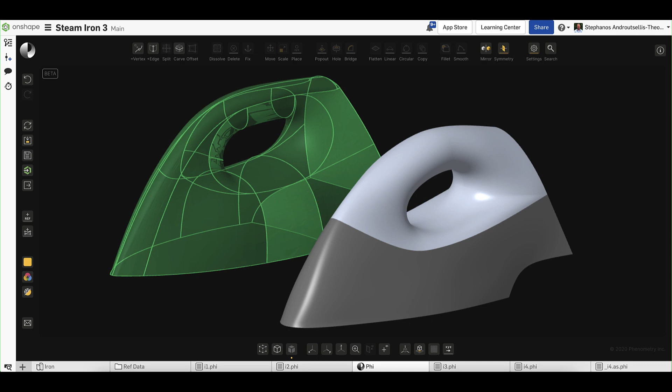We start by importing this Part Studio as a reference, that's why it comes green and transparent. We'll use the Convert tool to convert just two surfaces, the rear and the lower part of this steam iron.

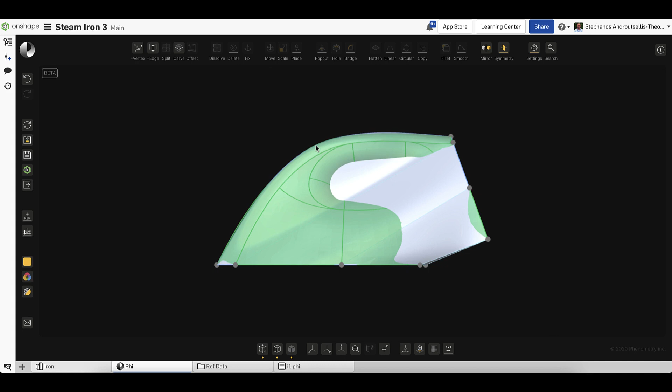As you saw, these are now two editable faces, and we do a bridge command between them to unite them. With this deformation, we immediately set the overall shape of our body. We add a vertex at a point we'll use later, and remove two edges added by the bridge command that we don't need.

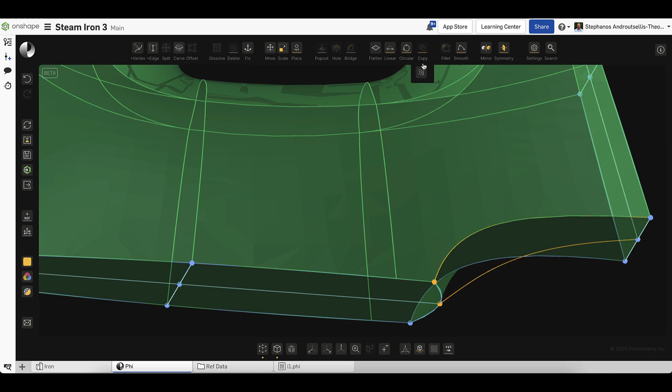Here we do a snap operation where we snap an edge onto a reference edge, and then a copy operation where we copy the shape of an edge onto another edge. So this is our starting overall shape.

We add an edge across this face, which is already there in the initial design. We're not snapping now because we don't want to exactly duplicate the design. We have some freedom in redesigning it our own way, and the same on the other side.

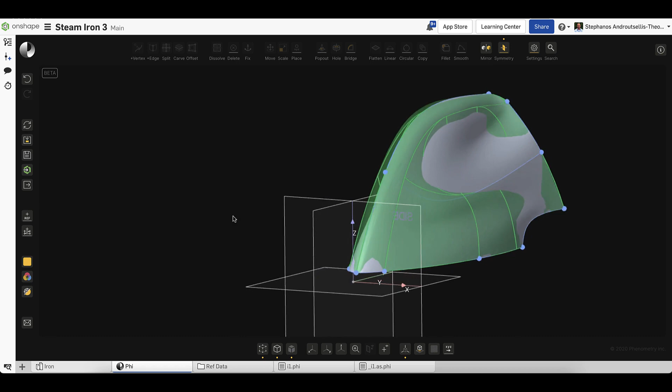We add a symmetry mate here in order to make the two edges perfectly symmetric with each other. As you see now, we deform the one and the other one is following - a little more symmetric deformation on both faces of this iron to make sure it's identical.

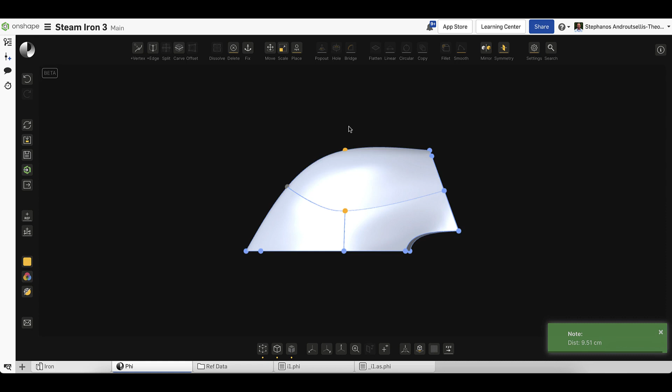Now we will add one more vertex at the location that corresponds to these two vertices on the faces, and we smoothen these new edges.

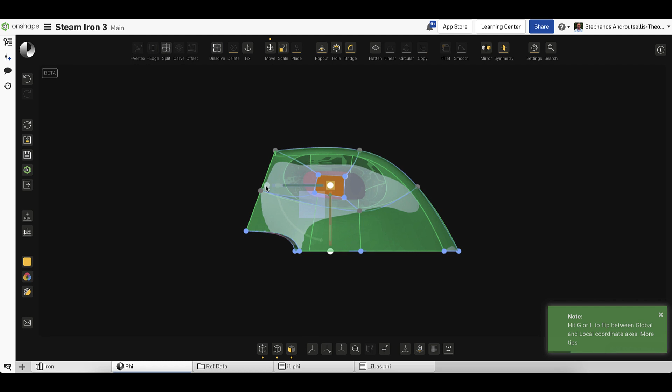Now we have to poke a hole through this face. The best way right now is by doing two offsets, which initially do not have the shape we're after. But as you see, we select them and move them roughly into place, giving them roughly the overall dimensions we're after.

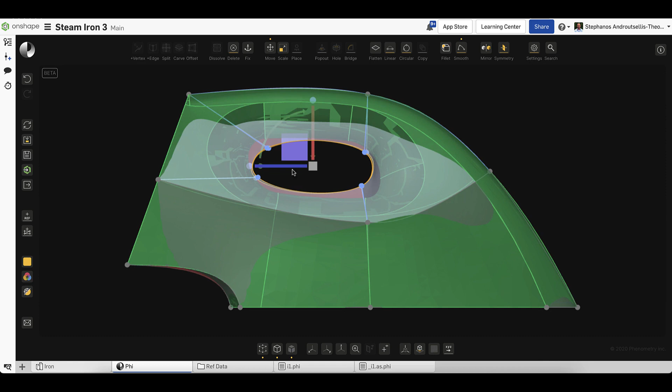Then we select them again and poke a hole through them. There's a relatively easy way of selecting the boundaries of these holes and making them all smooth, like we did. Once again, we deform them, and we'll also show the reference to get as close as possible to that without really caring to be exact.

Now we do an extra operation. We remove the boundary edges and vertices to get an overall smooth transition, and we also remove some edges that we don't need, the same on the other side. Now we have a set of relatively smooth faces.

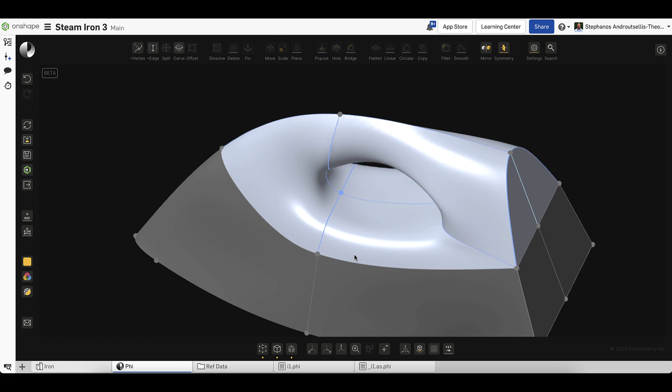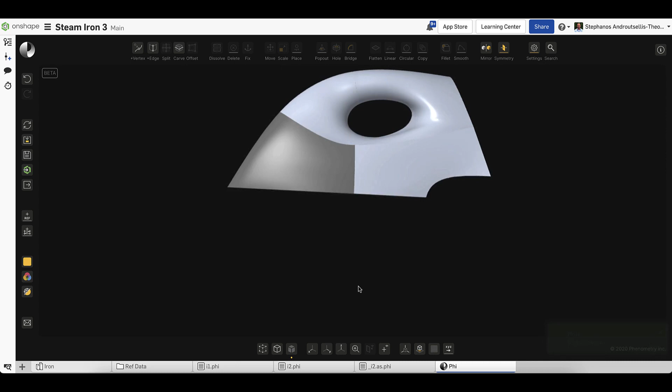At this point there is some pushing and pulling because, as I said, we have the freedom to give this the shape that we desire, and it needs a little bit of getting used to working with these freeform elements, the edges and the faces, and some final moves on the edges. This is the result of our design work after a little more modification.

Now we will bring in the initial reference model, and we will move our design out of the way for a comparison. As I said, we were not going for a perfect match, but something close.